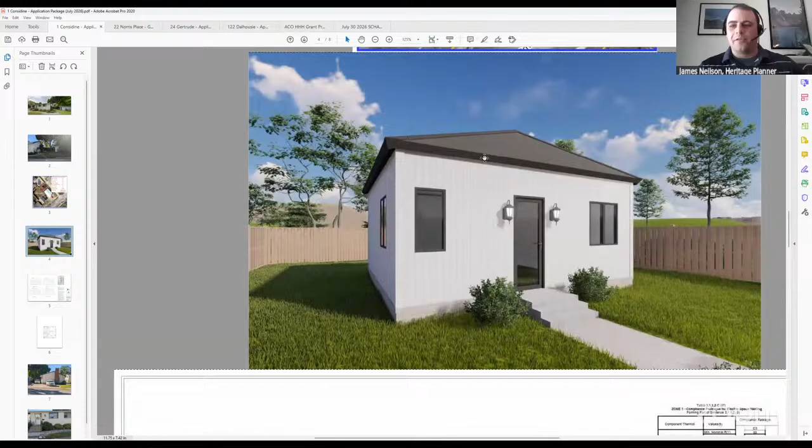Hopefully everybody can see that. So I'll just go through the images and the plans that you've provided, and you can just explain the application to the group. Okay, great. Thank you. If you want to speak to what you see on the screen, Davis or Karen, that'd be great. Can't see it. Okay, just a sec. Oh, I see it now. You want to go ahead, Davis?

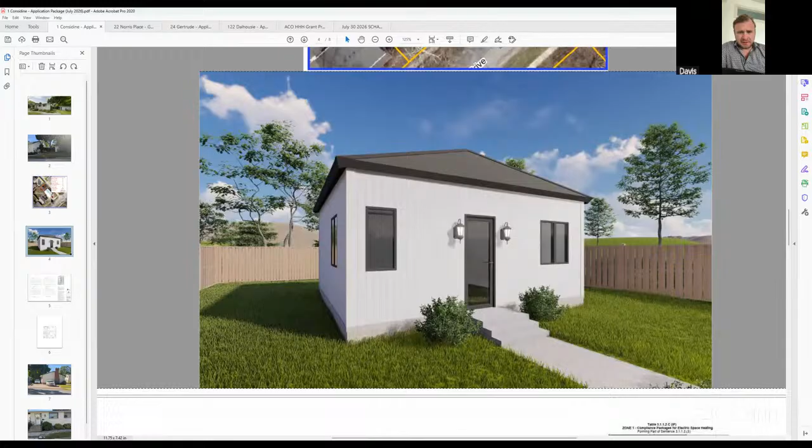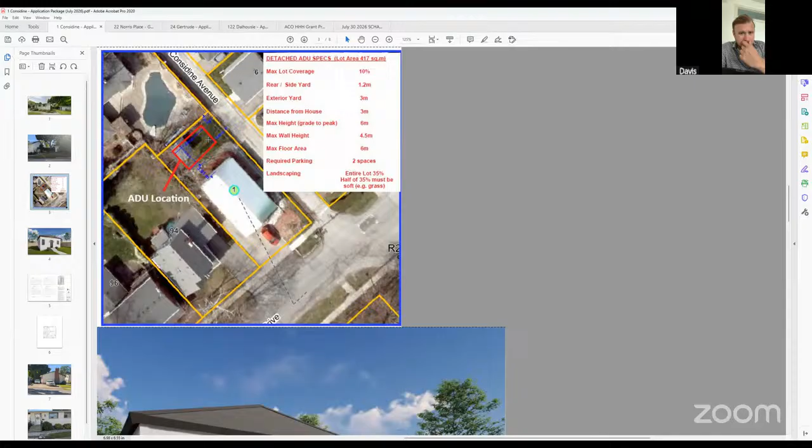Yes, sure. This is the additional dwelling unit that will be built at One Considine. It's just under 400 square feet. That's a picture of the outside there. The next one is the location behind the original unit where we're hoping to build. That is another picture of the location, and that's the shed that we'll be removing.

That is a tree in the back behind the unit. Possibly will remove or keep it there depending on the city's approval, Heritage's approval too as well, with the old tree there. The garden here could be changed too and updated. We're not too worried about the landscaping now.

That's the elevation drawing for the ADU, and yeah, that's the new—they don't have a sliding door in the back for this ADU, but I believe there's just a normal opening door. So we were hoping to maybe get a minor variance for that opening, so it could be a sliding door at the back, just to give a little bit more open space and room for the ADU. That's all the specs on it there though.

If all the plans that were pre-approved from the city of St. Catharines—these are built by Andrew Zuck at Backyard Homes, which the city has vouched for and vetted on these sort of projects. Next slide is fine.

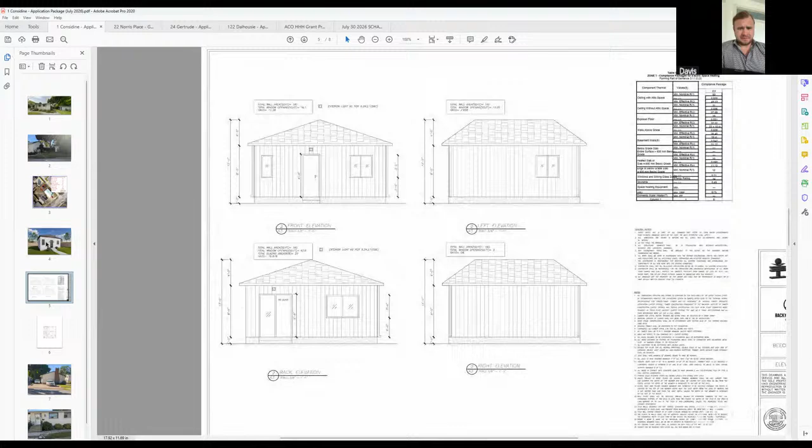This is the floor plan for the ADU at One Considine. So it's pretty open space. It's a great living space for a couple or whoever wants to live there. It's roomy. I've been into condos that are 400 square feet before, and this seems like a good floor plan. Open concept kitchen, bedroom there, and main living room.

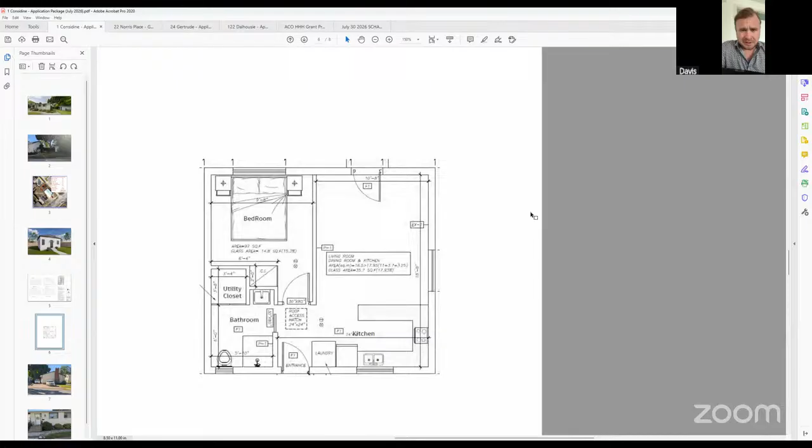So, laundry room and bathroom, utility closet. So it's a lot of space for storage and whatnot. I think it's proper living space. And Karen, did you want to add anything? No, I think you covered it all. Can you hear me? Yep, you're good. Yes, we can. Yeah, I think that's it.

And that's back to number one. Yeah, slide number one. That's an outside rendered picture of the ADU. So it's quite appealing too, I would say. Yeah, thank you.

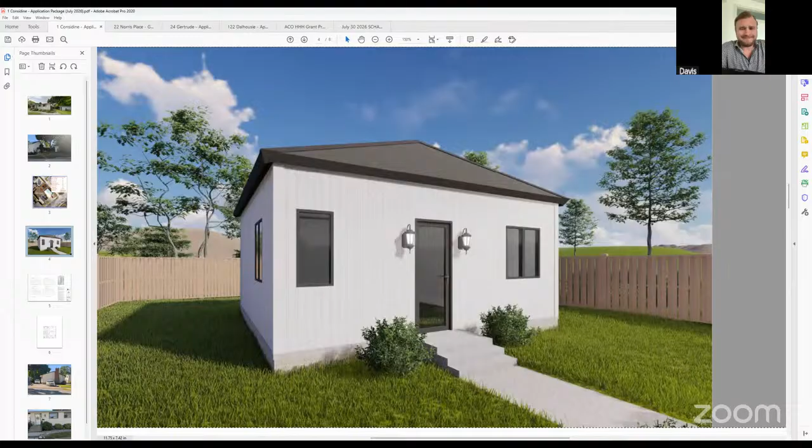Okay, thanks. Do we have any questions or comments about the proposal?

Mark? Yeah, is the question of the tree and the sliding door something that we are looking at today?

So typically, the sliding door is part of the proposed design, and it sounds like they do need a variance to make that happen. What we typically do is go through the heritage permit process and approve whatever we feel should be approved, and then that goes to the committee of adjustment. If there are any tweaks needed, because maybe the committee of adjustment says no to the sliding door, we can make those tweaks. Staff are able to do that. Essentially, in principle, the committee here can approve the project, and any tweaks that need to happen down the road, staff can take care of.

In terms of the tree, typically we don't worry too much about heritage permits for trees. There might be other concerns related to privacy or the age of the tree. I'm not sure what the committee of adjustment will require from Davis and Karen, but typically it's not something we have too many concerns about from a heritage perspective. The committee could certainly say they'd prefer to see the tree retained, and we can include that in the motion if we'd like, but there might be other concerns to factor in. I'm not sure where the tree is compared to the layout. I could put that on the screen, or maybe Davis or Karen could speak to that.

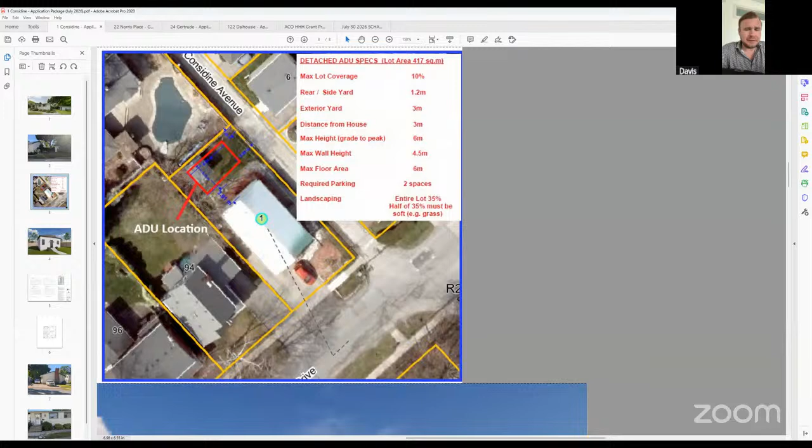Yes, the tree's actually pretty far away from where we want the ADU, so I think it's doable to leave the tree. Karen, what did you speak to them about?

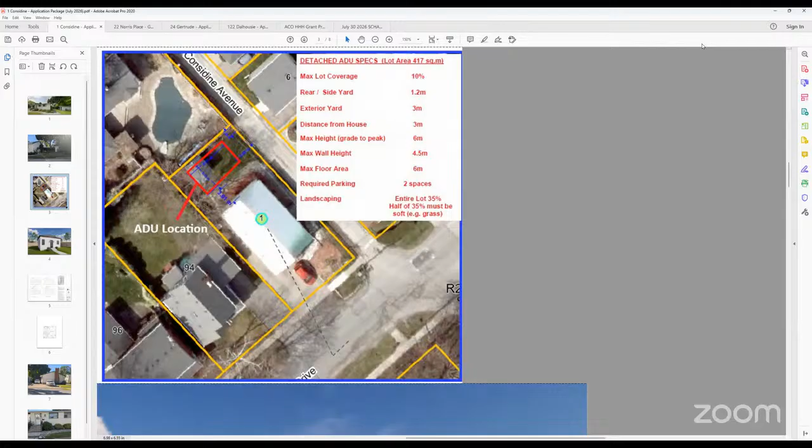Yeah, we spoke to the city of St. Catharines to see if we needed a permit to take down the tree, and that wasn't regarding it being in a heritage area, but they said we don't have to have a permit to cut down the tree if it's necessary. So it really is more as they get into the details of the building, to see if it will affect anything underneath the ADU, or drainage or something like that.

Okay. Andrew, you had a question? Yeah, just to address that first, I'd love to see as many trees kept as possible, but that's not really a heritage consideration. We'd like to keep it too. In terms of the back door, again, I don't really see that as a heritage issue. It's on the back of the building, sort of out of the way.

I just had a simple comment that increasing density is something that's happening everywhere, and it's pressure in a heritage area. This is one of the more guideline-friendly ways of doing it relative to some of the others we've seen. So I think this is a good approach, and the guidelines were considered in the design. I appreciate that. I would support this approach for sure, and this application.

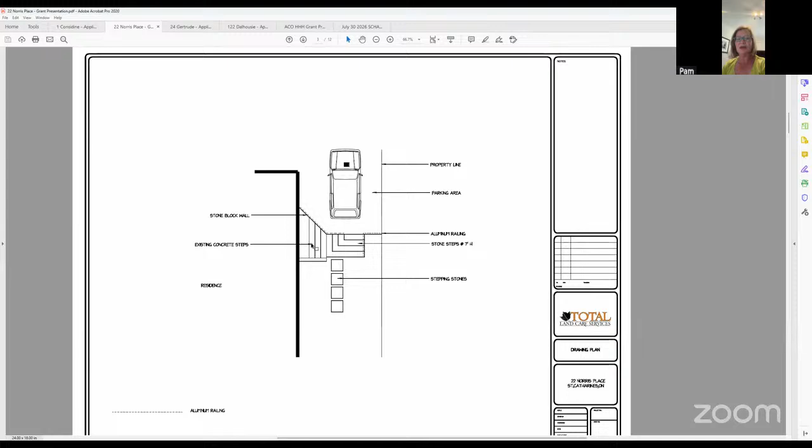So the drawing is about the retaining wall that needs to be redone, as well as an adjacent set of stairs that is visible from the frontscape. The existing retaining wall I'm talking about is located immediately adjacent to the foundation of the heritage home.

This has experienced a lot of deterioration, significant deterioration in fact. If the wall continues to fail, it can allow the soil supporting the adjacent driveway and surrounding area to shift and continue to erode, and it would place lateral pressure on the support and the nearby foundation.

You can see in the picture, it might be difficult to tell, but the existing retaining wall is constructed with railroad ties. They used that a lot in the 80s and 90s, and you can see it leaning. A car basically parks on top, and if it failed, the car could end up below. It's only 3 feet high, but it's still very structurally important.

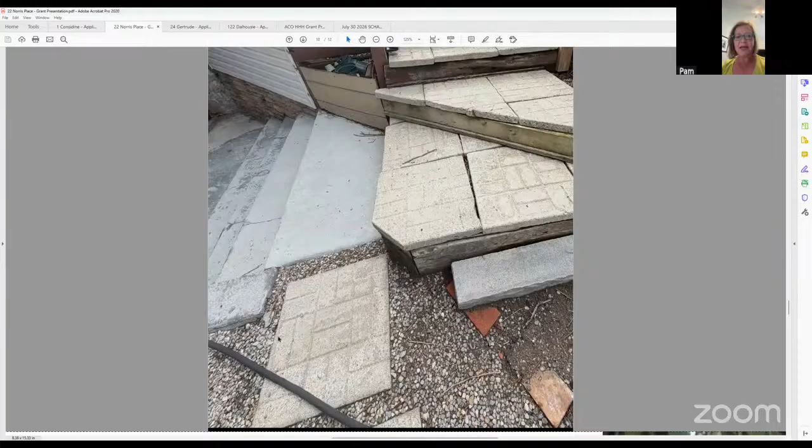I did provide an estimate, and I think everyone had access to it. I don't know if I need to go through it or not. Do you generally go through the estimate, or do you want me to just provide highlights? If you'd like to provide highlights, you can - everybody will have seen the estimate, it was circulated as part of the package.

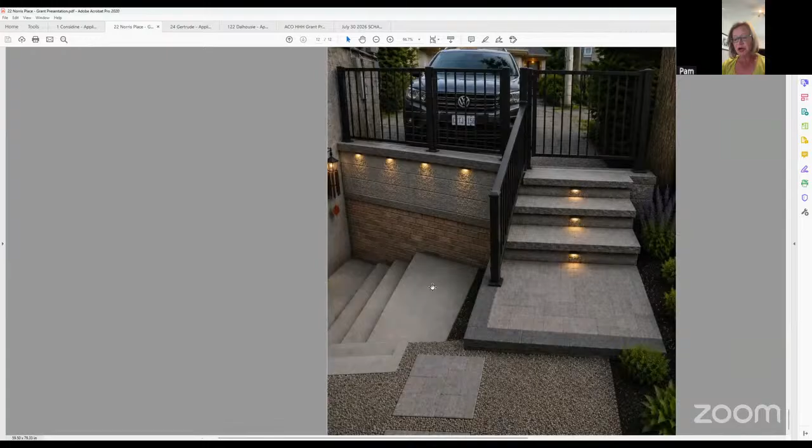So basically it involves removal of the current infrastructure, and it goes all the way back, past where the car would park, partway through to where the car would park. A lot of the pictures have already been shown - this is an actual rendering of what it could look like. It's not definitive, that was just an example. What else do I want to point out that you might not have seen?

The idea is to come up with something that is timeless, like the railing there - that's timeless. The one that is there right now is basically caving in. I'm going to summarize the overall project for the sake of time.

So the emphasis of this project is not landscaping improvement - while the retaining wall is a site feature, its primary function is to retain soil immediately adjacent to the foundation of the heritage dwelling. Because its continuing deterioration presents a risk to the stability of the surrounding ground, drainage is very important - right now there's no drainage. Ultimately this will impact the long-term preservation of the designated structure.

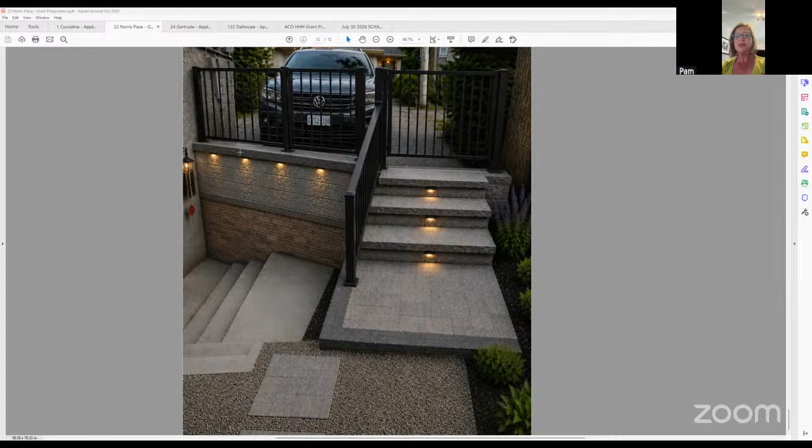I just want to say also, although the retaining wall serves an important structural function, it's also a predominant streetscape feature. You couldn't see it from the picture because there was a car parked there. But its reconstruction will enhance the appearance of the heritage property while protecting the building it supports.

So overall, fundamentally, the project is about long-term preservation of the heritage property. The retaining wall is not an isolated landscape feature; it performs a critical structural function immediately adjacent to the foundation of the designated home. Replacing it before further deterioration occurs is a proactive conservation measure that protects the historic building from soil movement, water infiltration, and potential structural impacts, while restoring an important element of the property's historic setting. So overall, the proposed work balances structural necessity with heritage conservation by using materials and details compatible with the character of the home.

So I don't know if anyone has any questions.

Yeah, thanks, Pam. Lorraine, I think I saw your hand up first. Yeah, and I apologize, my chat feature is not working today.

So, Pam, you've really stressed the landscape, the heritage aspect from the road as well as a feature of the house. Do you have any pictures at all that show what this looks like from the street?

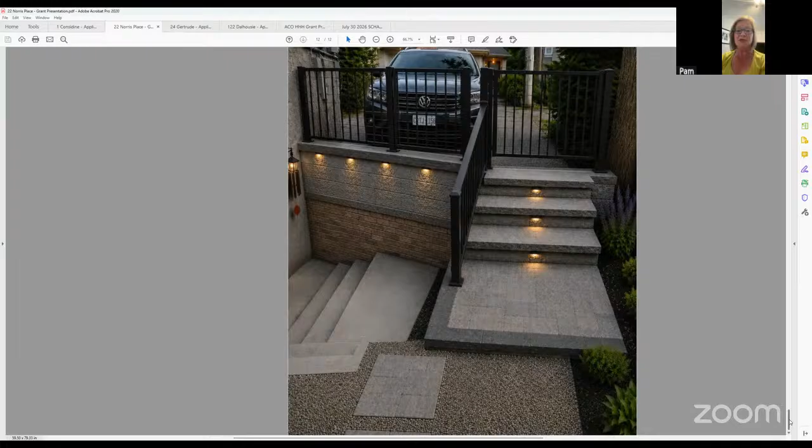So I just have a problem with this. Has your contractor guaranteed this work? Is he going to give you a guarantee on this retaining wall and interlocking brick?

Yeah, and in fact I should mention that I'm also going to have an engineer, contracting an engineer to do a drawing and make sure that this is done properly. So I should also state that.

Holly, it does look like, and I realize it's not a great image, but I believe that might be a drain. Pam, could you correct me if I'm wrong? Yeah, that is a drain right there.

And just to answer your question, that is another issue that I'm dealing with right now, but it's separate. Like that's something I'm also dealing with in addition, yeah.

Like we're talking a lot about you doing this to improve your driveway. I was taking some notes while you were talking. You were talking about soil movement and improving your driveway from eroding. I built a retaining wall with interlocking bricks similar to your sketch and rendering, and 5 years ago it's shifted and moved.

It's not going to be guaranteed that this is going to be the solution. Have you looked at other contractors, maybe getting quotes like pouring concrete or doing it with a solid concrete retaining wall?

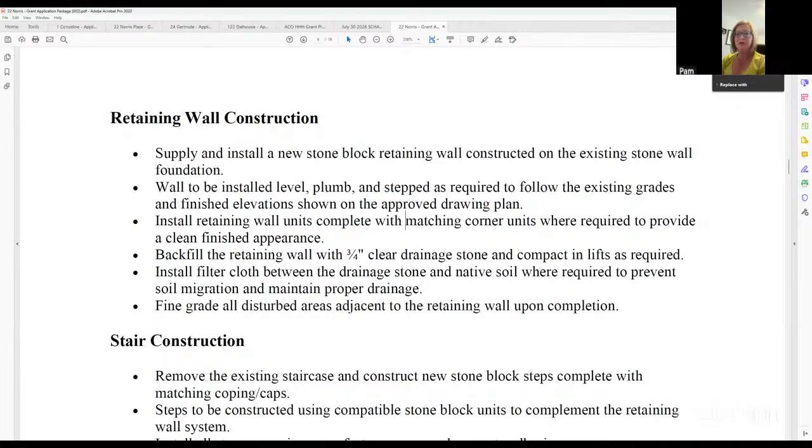Looks like Brian's still not back yet. Does anybody else have any questions or comments? Lorraine? Sorry, again, no chat.

So the thing I'm debating in my mind is the part you had said, Pam, about the structural piece. Is it that we can give you money towards this renovation of this retaining wall on the idea that, sorry, I'm just slowly thinking about this, on the idea that it will disintegrate or fall apart or reduce the heritage aspect of the house? Is that really the grounds that the Heritage Advisory Committee can give you funding for, James?

Yeah, I think to me that's the issue. The primary issue, in my opinion, is and where the grant should kick in is where the structural issues are. The appearance, I mean, it's definitely an attractive design, but it's not as important as what the long-term impact could be of the structural issues, right?

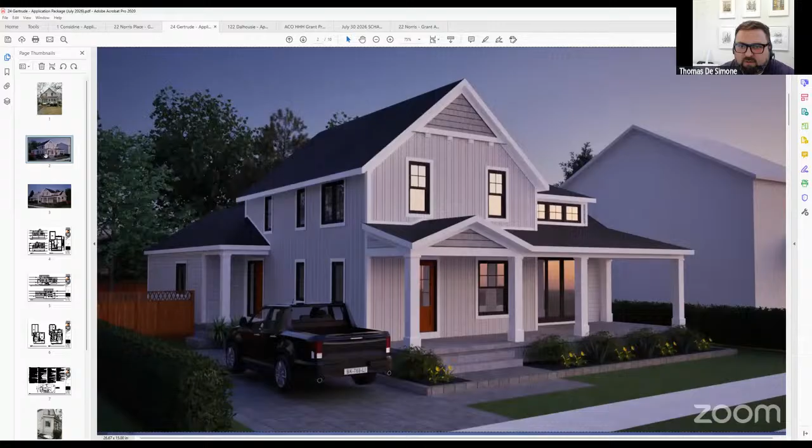He grew up here in Port Dalhousie, and after spending many years living elsewhere, he made the decision to return to the community that he always felt like was home. I'm going to try not to take up too much of your time. So rather than walking through all the documents page by page, since everyone's had the chance to review the plans, renderings, and heritage design brief, I thought I'd provide a brief overview of the proposal and the design rationale behind the key decisions we've made.

The existing dwelling represents a typical Ontario vernacular cottage that has evolved over many decades through a series of additions and renovations. While its original front gabled form and overall massing remain evident, many of the finishes and architectural details visible today are a result of more recent alterations. Rather than creating an inauthentic historical appearance, our proposal seeks to thoughtfully build upon the home's evolution by introducing exterior improvements and enhance its longevity with a contemporary addition that provides functional, open concept living spaces better suited to a modern family life.

Throughout the design process, careful consideration has been given to respecting the existing dwelling's character while preserving its contribution to the Gertrude Street streetscape and the Port Dalhousie Heritage Conservation District. We aim to preserve the front gabled form of the existing dwelling and maintain its visual prominence from Gertrude Street. We then wanted the addition on the right side to remain clearly subordinate to the original house by setting it back from the existing main gable. The original dwelling continues to be the dominant architectural feature from the street, while the addition remains compatible yet distinguishable in accordance with the Port Dalhousie Heritage Conservation District guidelines.

The front porch was something Darren felt very strongly about. The existing enclosed porch is proposed to be replaced with a larger open covered porch that connects the home with the street. This opens up access to the existing front door and existing main floor window. The new porch is intended to become an extension of the front yard where family, friends, and neighbors can gather.

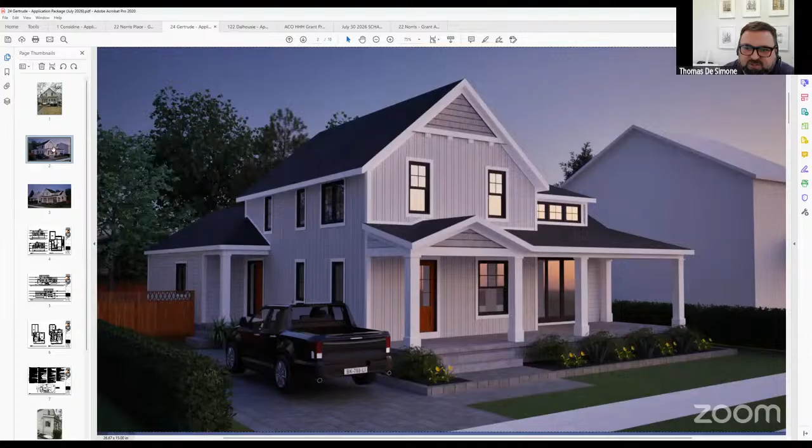Our overall goal was to create a proposal that respects the existing dwelling, preserves its contribution to the streetscape, and allows it to continue evolving as a functional family home for future generations. So I thank you all for your time.

Okay, thanks. Do we have questions or comments about the proposal? Mark: Yeah, I think it's a good design and it fits well in Port Dalhousie. I've seen multiple buildings just like it, and the design is tasteful. So that's all, just a comment.

If I can add one thing, one of the reasons why I want to temporarily lift the house and redo the foundation is obviously age, but to increase the square footage rather than doing a two-story addition on the right, where the ratios don't match. I want to keep a little more of an unassuming front look. So having the square footage in the basement under the new addition and under the existing footprint of the original structure was my goal. I'll still have plenty of space, but don't need to do a two-story in this rendering on the right — just an open vaulted space with lots of light coming through. So that was my intention. The elevation of the home is not going to change; we would just lift it, do the work, and set it right back down at its existing elevation.

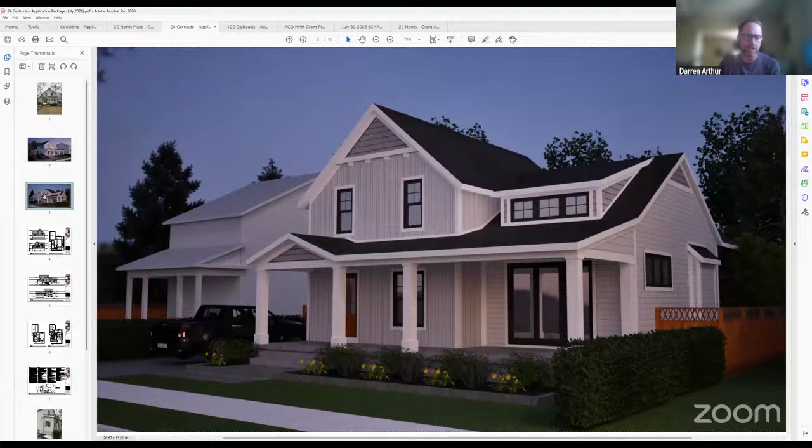Hollowed out stumps like that will make excellent planters for a garden feature. My landscaping intention is a lot of flowers, some evergreen, and good separation for the neighbors. I'm not just going to do a bunch of rocks — I have a bit of a green thumb, so I want a lot of color and texture on the front, not just an open wall, with some height variations with different plants. I know the rendering he showed shows nothing there, but to the left and right I'd most likely put in something mid-sized vase shaped, maybe a Japanese maple, or a serviceberry — a native plant. I'm not too sure which one, I'll have to look it up. The birds will love it.

Lorraine, if we're basically finished discussing it, I just wanted to say to Thomas how much fun I had reading his report. It was like a cloze exercise I used to give students, where you had to guess the missing words. Did you notice that? In my report item I did it secretly just for you. The EV really threw me till I figured it was evolution. Yeah, parts of the words were missing, so it was kind of fun.

Okay, so do we have a motion to approve the addition and alterations? It's just our typical, very basic motion that the St. Catharines Heritage Advisory Committee recommends approval of the addition and alterations to 24 Gertrude Street.

So Mark, you want to make the motion? Okay, then all in favor? Okay, guess that's done. Great.

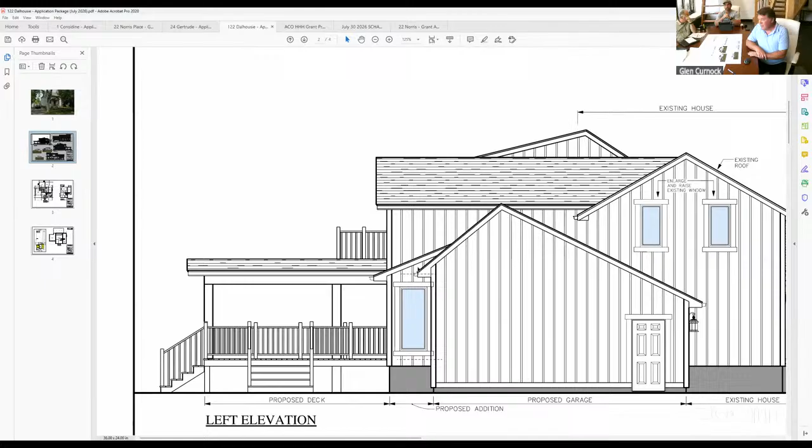So at 122, we're doing an addition on the house to increase some square footage. The easiest part first is the garage on the left-hand side. The garage is stepped back to meet the setback for zoning. The height of the garage is kept low so it doesn't go above the existing roof lines, to try to keep the garage as minimal as possible.

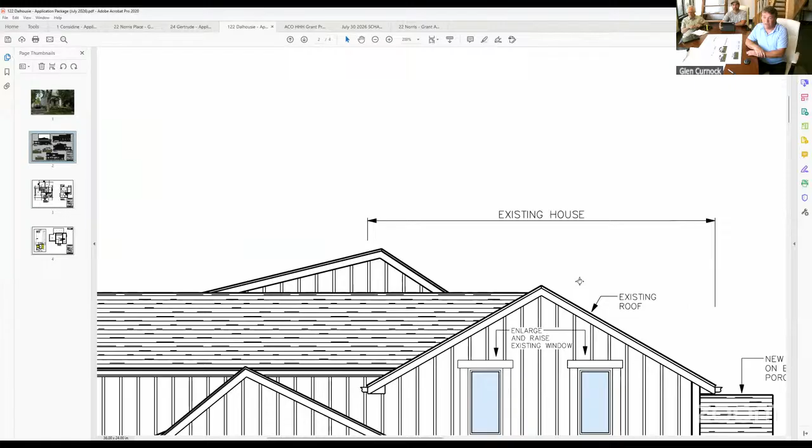Moving to the front of the house, the existing porch roof is being increased slightly in pitch to help take away from the way the second story was built, with a large blank space above the existing windows. We want to increase the existing windows to meet the proportion of a more traditional 3x5 double hung window. The original windows have been changed out and I feel they're not in the exact locations they were originally, so we're trying to proportion the front of the house to what we think it was, or should have been.

The addition on the right-hand side involves a change in materials to mimic the setback, and we're also sloping the roof back. It does peak 2 feet higher than the existing roof, but it's 9 feet back from the original peak, so you really won't see that the addition is higher. That's happening because we're trying to have a proper 8-foot ceiling on the 2-story part of the addition at the rear. We kept it 1 story at the front and 2-story at the rear, and to make the height work with a standard roof, that's the height we came up with.

Basically, we're trying to keep the symmetry of the front and not have the additions project forward as much as possible. And then you guys want to add on to that too?

I'm not sure what to say here, but I've lived in this neighborhood—we moved here in 2001, and I've always respected the heritage designation and supported everything that Carlos did. So we want to be sure we're as consistent with the protocols as possible.

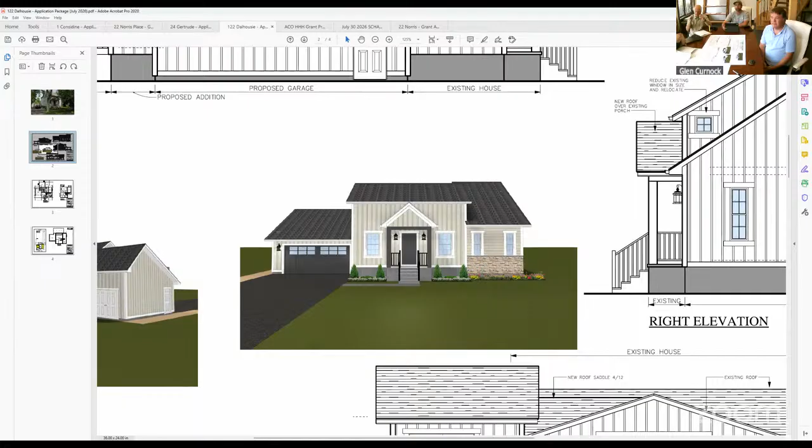We had some constraints because we wanted to enlarge the principal rooms without doing the shotgun idea where you just build out the back. So this plan allows us to make our kitchen a little bigger and our living room a little bigger, and to add a small bedroom/office and a 3-piece bathroom, without having to abandon the space in the existing house and build all those rooms out the back, which we were trying to avoid. That's it. Okay, thanks. Do you have questions or comments about the proposal?

I had one question about the windows on the existing house. You thought that they were not original, or moved, or something? To me, they almost look like they are contemporary with the house.

So are you talking about enlarging these openings, or what exactly are you doing with these windows? They're approximately the same height. We're looking at making them about 4 to 6 inches wider, just to make that 3x5, which is the colonial, traditional colonial window size. So it could be original with the house, but I think historically they may not be consistent with the era.

I'm just looking at the trim and the size of them. I think they're originals, at least they look that way to me. I don't know what the rest of the committee thinks about that.

What do you think? The inside of the house is renovated, so the surrounds to me are because you can see similar surrounds up here as well. I think the size and shape and the actual windows themselves inside are probably either vinyl or aluminum, if not mistaken. The owners can probably chime in on that, but those aren't original wood windows as far as I'm aware. But the surrounds to me look like what you'd probably see from that era, maybe the 1870s.

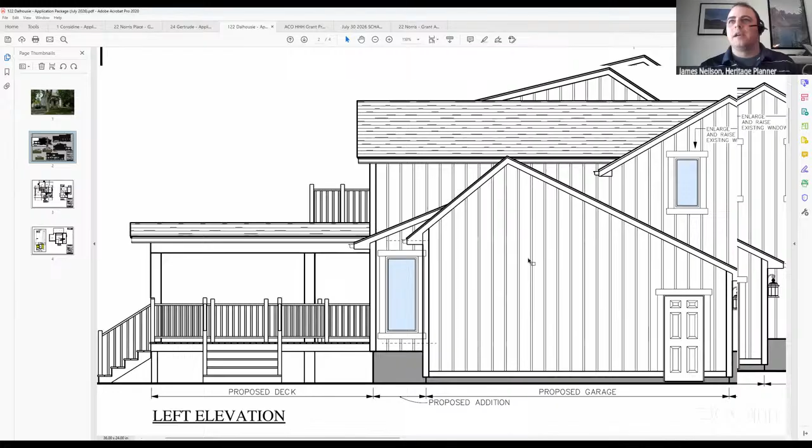Exactly. Okay, because I think the confusion that's happened is because of the notation here where it says enlarge existing window. I think that, and because of the shape of the window here with the flat lintels and sills, is causing some of the confusion. Perhaps I'm not sure if that's how the rest of the group feels, but I think that's maybe what's happened.

Okay, so if the surrounds are going to be kept that are on the building now, then I don't have as much of an issue with it in that case. Typically, we would be reflashing around them. Once putting in a new window, it's going to require a new brick mold to put a new window in.

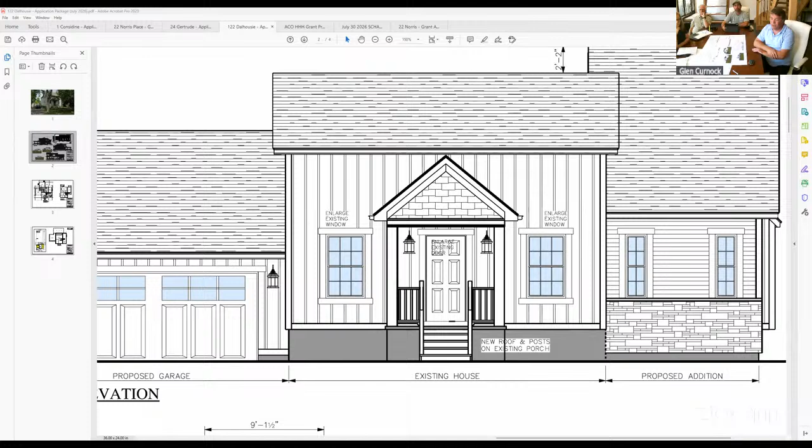Yeah, I mean, the plan is to reclad the building, and being it's a heritage area, but it's not a heritage building - so we're trying to keep the feel of the area, but I don't see keeping that trim as an important part of the house, because I'd be hard pressed to think that's the original trim. Yeah, definitely can't be the original trim. It's aluminum trim, made out of aluminum.

So sorry, the actual window itself is aluminum, but the trim around - no, the flashing around the window would be aluminum. The flashing around the window is aluminum? Yeah, that's right. I'm just seeing if I can pull up a better photo of the building, because this one's a little grainy and not great. Yeah, because I thought those surrounds were made out of wood or something. No, just painted brown. You can see it in the Google Street View if you zoom in. It does appear to be aluminum.

I'm going to pull it up on the screen right now. But I'm not sure you can properly investigate what's there in terms of original material until you remove that aluminum, and if that's a reflection of the original shape and style, I think that should be retained. Typically, the last homeowner that would have clad that house and inserted those windows would have reflashed all of them. In my opinion, I'd say that's probably done in the late 80s, early 90s, based on the style and color. So they've been replaced.

We're looking to expand the actual glazing width while keeping the original, or as close to the original, rough openings. Yeah, I mean, expanding it as much as you can within the original enclosure makes complete sense. It's just hard to evaluate with that cladding over top of it, and when you work with a heritage building, that's the reality - every layer you remove comes with surprises and sometimes a refocusing of your perspective. I just think once you remove that, you may see something there that ought to be retained.

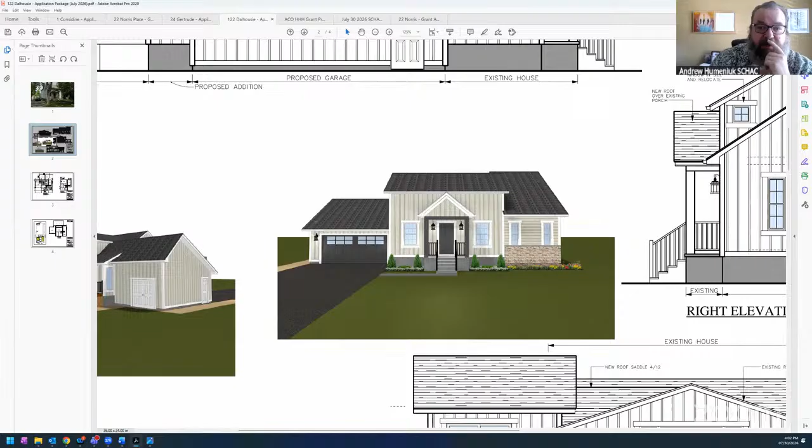So that's one consideration, but I certainly would prefer to see it set back from the front of the house the way the garage is. That would preserve the presence of the original house better. And I understand from the report that you've tried to address that by using different materials and so on, and that does accomplish that to a degree. But I do think if we refer to the guidelines, it should be set back from the front of the house.

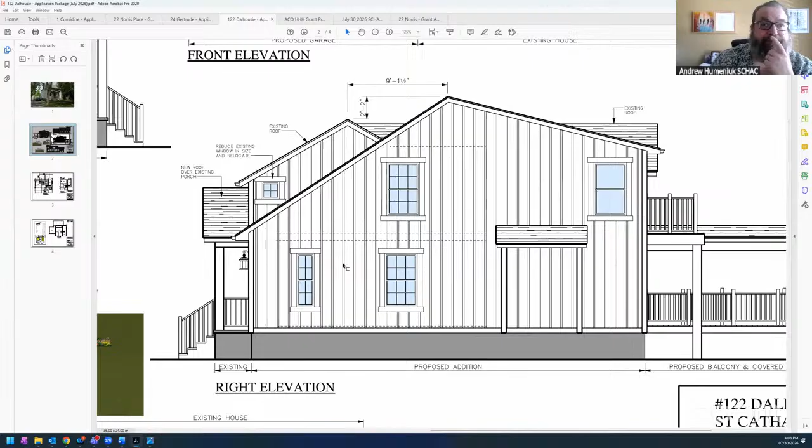Other questions, comments? Mark? Yeah, I do agree with Andrew there. It's, I don't know, there's something about this design, I can't quite get my opinion out. It just seems like an odd addition on that right side especially, and I think the setback would help that a lot.

I would agree with both those as well. If you isolate the front, it looks like it contains more of that heritage appearance, whereas now it just looks like one long building.

Yeah, we've tried to set that right side addition apart by changing cladding direction. Rather than the board and batten that's on the original structure, we've gone to horizontal cladding, and then stone on the lower half. Is there another way around that you could suggest without losing the space that we're looking for?

We're totally on board with obviously trying to comply with what the neighborhood suits, but we also are trying to achieve the goal of not losing the space that we're looking for.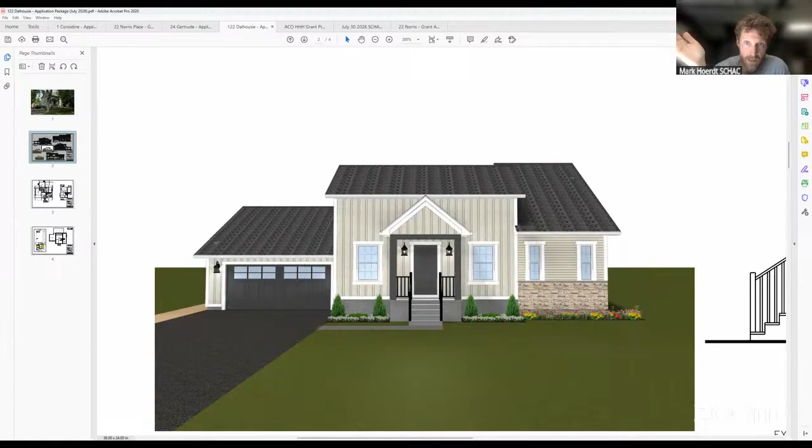I think Mark has his hand up. Yeah, I mean, I know this is inside detail, but is that going to be a vaulted ceiling? You could potentially make it a vaulted ceiling to get the headspace instead of having a flat ceiling that's just 8 or 9 feet. But which area are you talking about?

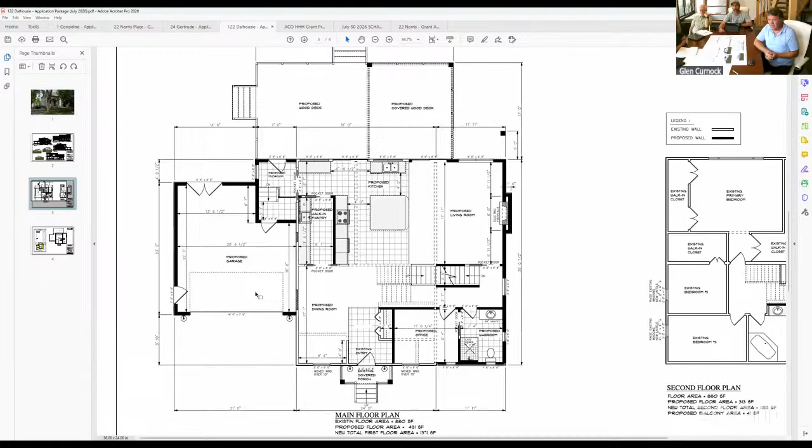The right side addition, if you're looking from the street. So that's the main floor plan here, and then the second floor plan is right here on the right. So there's no vaults, there's a second story above the living room.

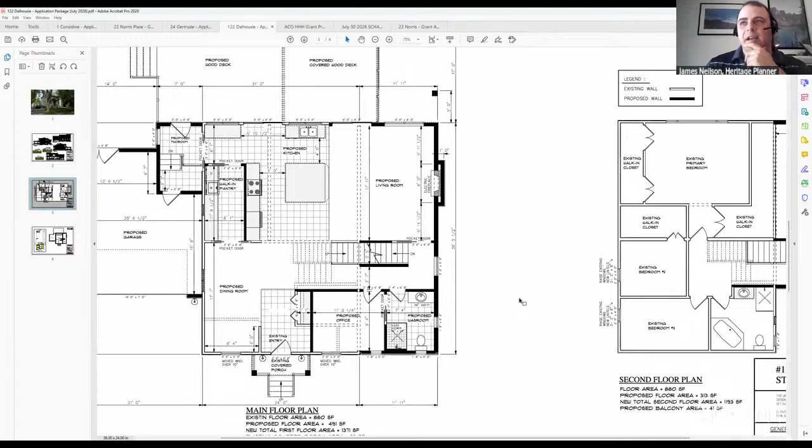So immediately behind the wall, the first story — because the front of the building is one-story, essentially looks like a one-story addition — has a proposed office and proposed washroom there. There's no second story above that portion because the roof is too low, and so it does slope back towards the back. As it gets more room, there's a staircase here that allows access up to the second floor.

Let's see. I guess my comment on that is sometimes you can't fit a square peg in a round hole, and I'm not sure that we should be compromising on the guidelines to facilitate that.

The proposed office on the second floor — couldn't the proposed office on the first floor become part of that? That's a huge room, that's a huge office. Again, we shouldn't be commenting on the inside, but that would be my first thought.

So we want to be able to live on the main floor, so the office is actually going to potentially be a bedroom for us if we need it, as they grow older.

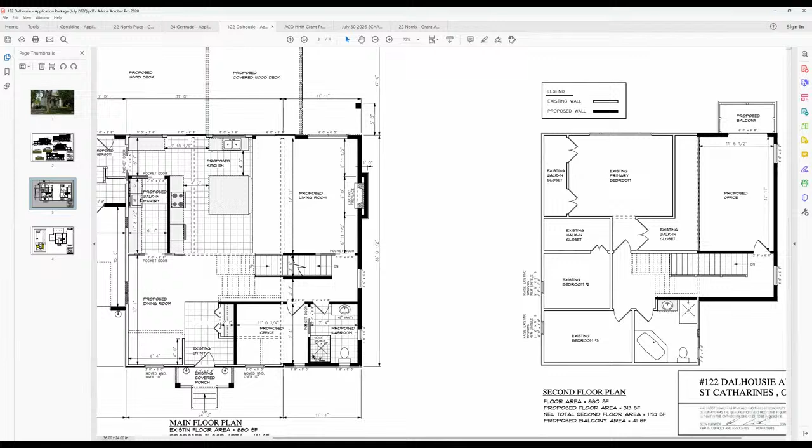How much of a setback could you have if that proposed washroom on the main floor was reduced in size? How much wiggle room do you have to push it back so the main part of the house, the heritage home, is differentiated? The dimensions noted here, so everybody is on the same page, it's about a little more than 7 feet wide and a little more than 9 feet long. So you're looking at a 7 by 9 washroom.

It's not a huge space because the jog would put a jog in the proposed office on the main floor. So if you took it back a few inches, you're going to get this awkward jog versus keeping the walls flush.

We've also taken into consideration that we'd like to remove as little foliage and trees in the area as possible. Clearly old trees, we want to keep as much of that as we possibly can. Jogging that would force us to set it back further to maintain the space we want. So we're trying to do this in a way where we're also being friendly to the environment as well.

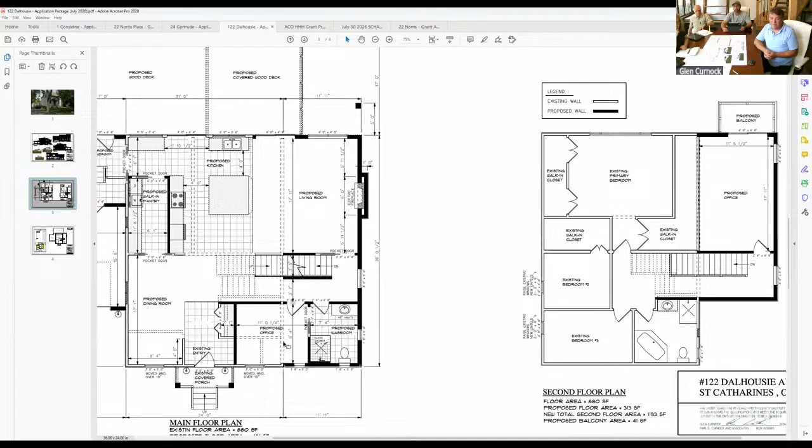Other questions, comments? No? Okay, if there's nothing else, I guess we should make a motion about this.

So the motion, our standard motion, is to recommend approval of the addition and alterations to 122 Dalhousie Avenue. Based on the comments that have been made, are there any changes that anybody proposes to the motion?

Is that the limit of our options, or can we request... Sorry, Andrew, I didn't catch that, I interrupted the last little bit. Just saying, or can we request a revision that includes a setback?

Yeah, so what we could do, as we've done in the past when there's been these types of issues, is put conditions in saying conditional upon a step back from the front addition — or I'm not sure if there's issues with the windows we discussed before — but those could be embedded in the motion so that it provides the owner and the architect some guidance on what they need to do to get their approval. Then that would just be handled by staff, and we wouldn't have to bring them back to the Heritage Committee in the future. I would just make sure the intention of the motion's been met.

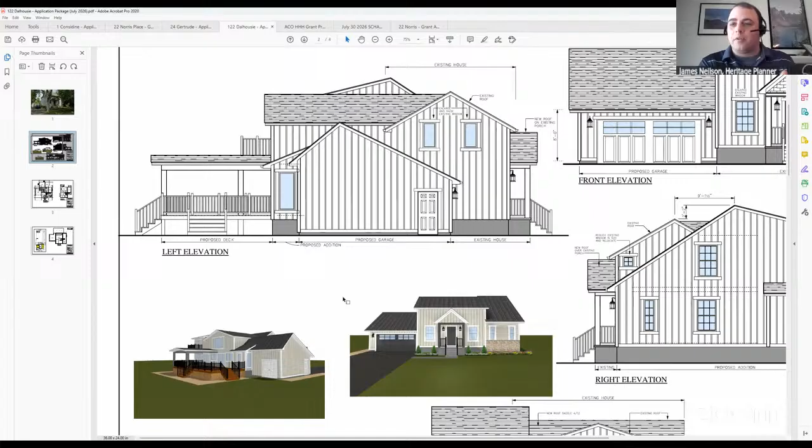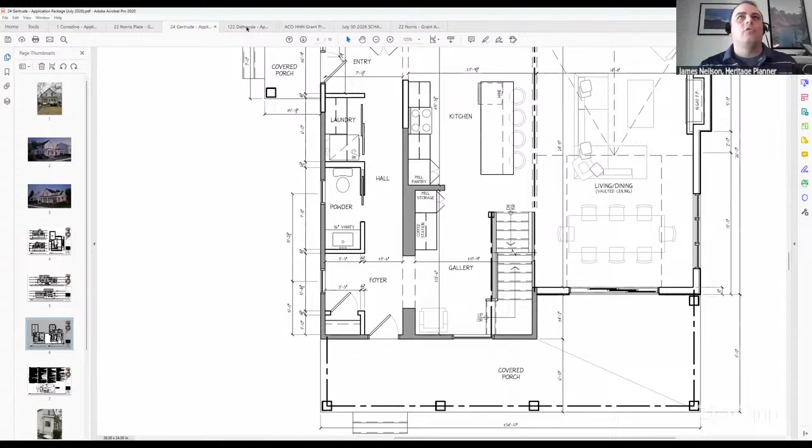But what is the recommended setback for a situation like this, James? So in the past, it varies. Every project's different, but if we look at even the previous proposal we just deliberated on, their setback was very small. I think it's 4 feet, not the 9 feet that the garage is set back. So the setback proposed for the Gertrude property was 4 feet essentially, not as significant as the 9 feet the garage here is being set back.

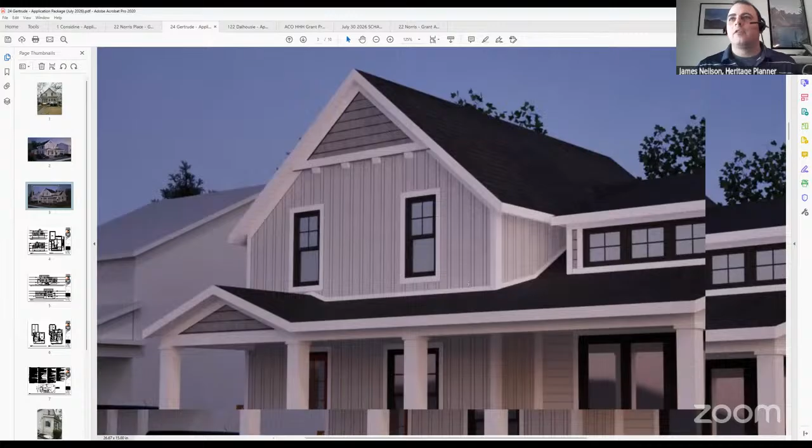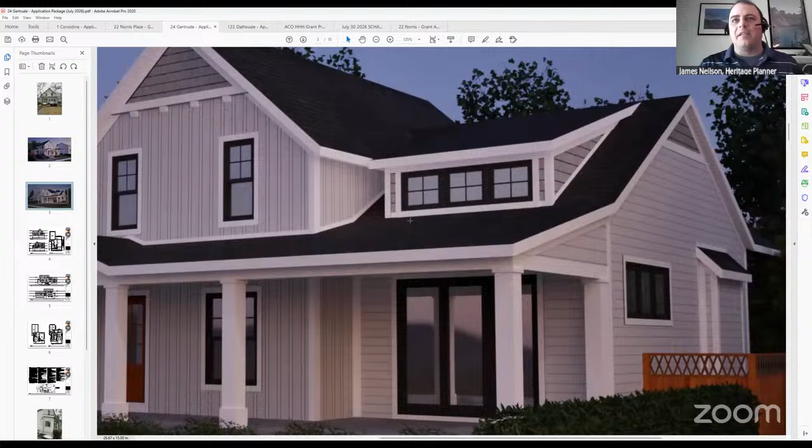And is 4 a minimum? It's almost 9 feet, 8'10" is the setback of the garage. I think there's probably flexibility to not go that far, based on the committee just approving something on Gertrude that was 4 feet. When I brought it up with the applicant, I said 4 to 6 feet generally is what we've typically been able to work with, especially since they've tried to set the massing back as well. That's similar to what happened on Gertrude, where they set their massing back too, shifting it towards the rear to limit impact on the front. So it's similar ideas, just this one doesn't have that small setback that the Gertrude property has.

James, are you familiar with 106 Lucy? Off the top of my head, I'm not, but I can pull it up on Street View and I'll probably be reminded of it, and show it to the group.